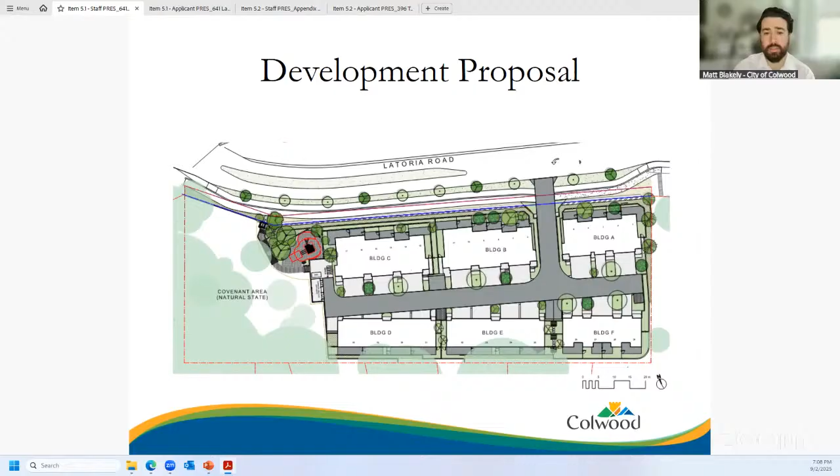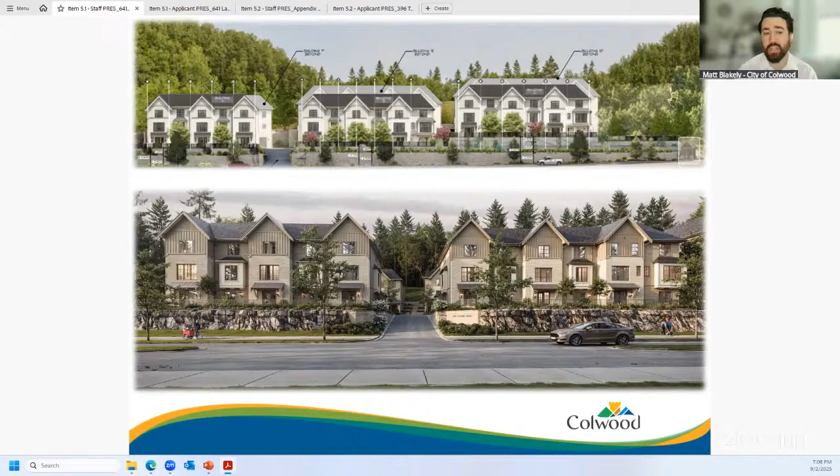These are a couple renderings from the Latoria perspective. As you can see in the bottom rendering, there are pretty steep slopes and existing bedrock formations making up much of the frontage of Latoria currently. There's limited site depth, which introduces several challenges necessitating large retaining walls in several locations to make the proposed development feasible. Next slide, please.

The proposal has multiple retaining walls that exceed the maximum permitted retaining wall height of 1.2 meters. The subject retaining walls needing a variance are highlighted in pink. I should clarify, a comment came in during public participation that any retaining walls over 1.2 meters will be required to be designed by an engineer, so that's not a concern with this project. Those designs usually come at the building permit stage once all development variance permits and development permits are approved. The highest retaining walls are generally at the back of the property near building D, and then as you can see, several along Latoria Road would sit on top of an existing bedrock rock face wall.

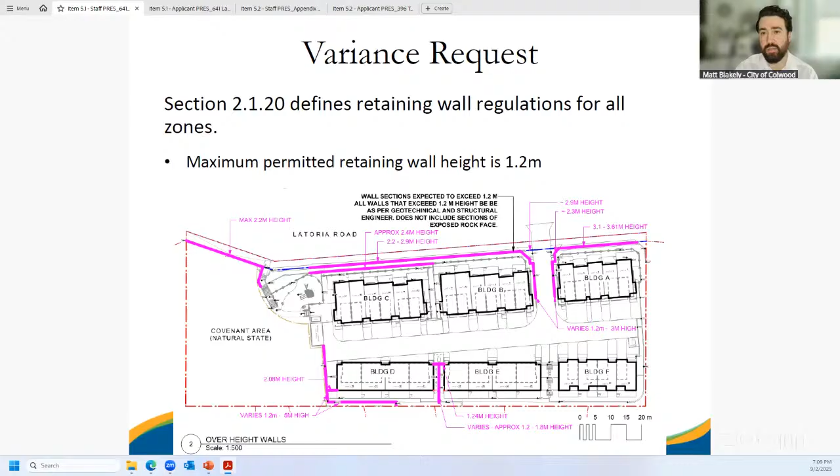Staff do recognize that the roughly 18 feet at the highest point will be an imposing visual presence, but I think there are some mitigation strategies the applicant is using that will help to mitigate that. Next slide, please.

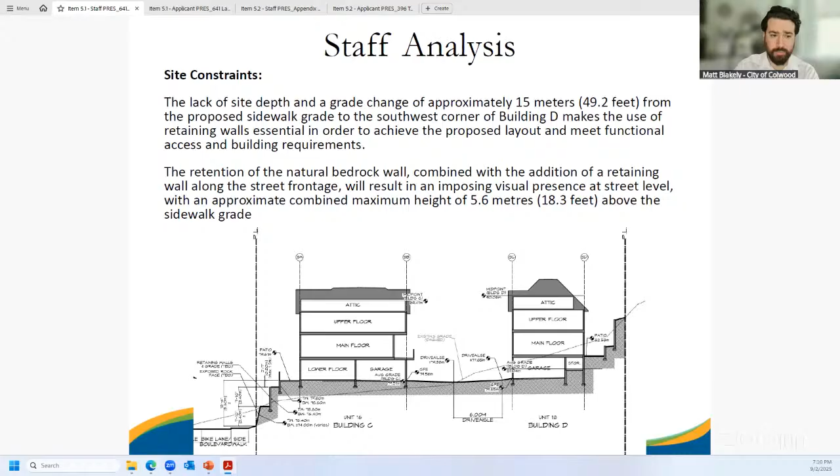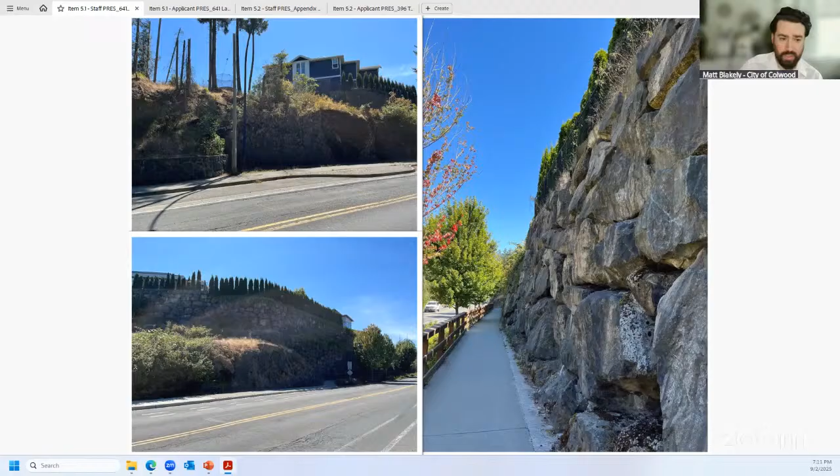Some more renderings showing the treatment on the rock walls. The applicant has also proposed the use of vegetation for screening, which in combination with a textured verti-block wall system, shown in the top left corner image, with a retaining wall in the bottom left corner, is the texture they're proposing. The applicant has a few images in their presentation that will speak to this as well.

The anticipated appearance of the verti-block walls and natural bedrock walls integrated with vegetation will help to mitigate the overall visual appearance and reduce the negative visual prominence of the walls, enhancing their integration with the environment.

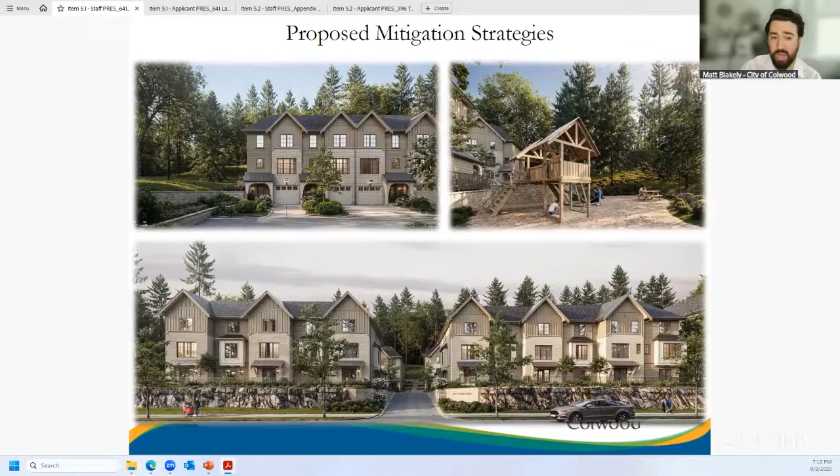As part of the communication process for this application, notifications will be sent out prior to the council meeting. Members of the public are invited to submit comments regarding the variance application, either in writing or by speaking during the public participation period at the council meeting, later on in this process.

Staff recommendation: the proposed 29-unit townhouse development at 641 Latoria Road requires a development variance permit to increase the maximum retaining wall heights in several locations throughout the site to facilitate the proposed development. Considering the unique constraints of the property, the significant portion being preserved in its natural state for environmental conservation and restoration, and the proposed visual mitigation measures by the applicant, staff recommend that the Planning and Land Use Committee recommend approval of the requested variance to council.

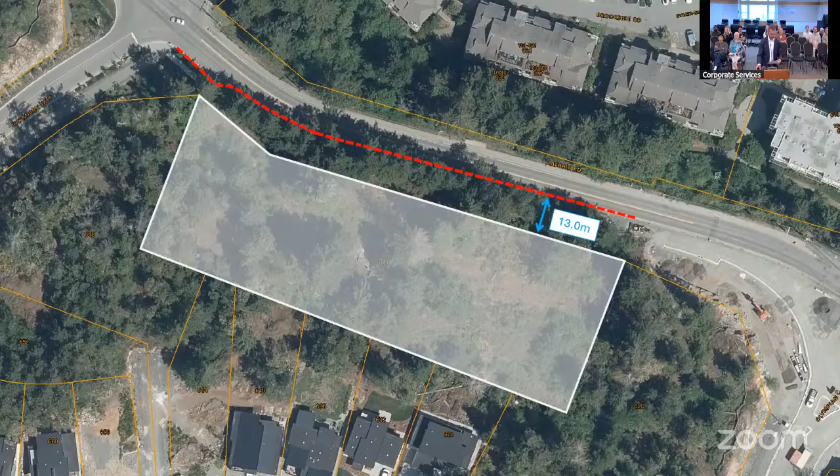The anticipated right-of-way improvements along Latoria are one of the reasons for the requested variance. The existing grade of Latoria is already below the grade of the subject property, and in addition, the current edge of the asphalt, shown by the red dotted line there, is 13 meters away from the existing property line. This image shows the existing conditions along Latoria.

Subject property is to the right on the screen. We've tried to limit the retaining wall heights by sloping the driveway entrance into the property as much as possible, maxing out at about a 15% grade coming into the site.

I'll mention while we're on this slide that in order to facilitate the roadway improvements with boulevards, bike lanes, and center median along Latoria, the entire 13-meter boulevard space between where you see the road right now and our property's frontage will need to be utilized. Hence why the Latoria Road grade will cut further into the property, exacerbating the issue of getting up onto the proposed development site.

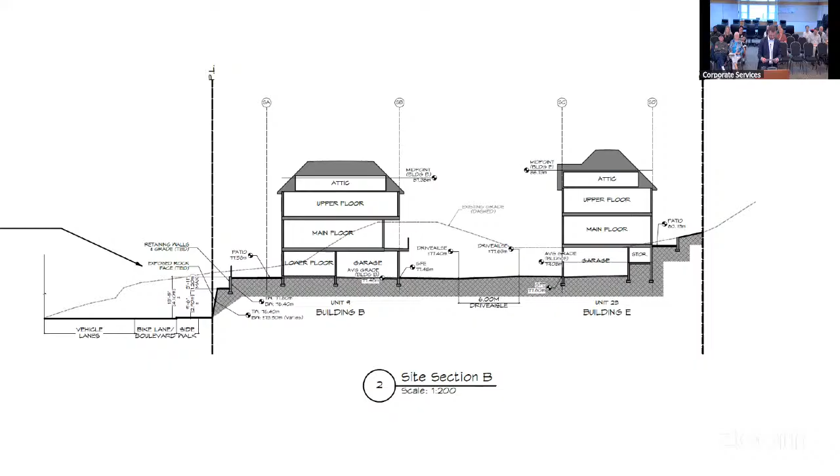This rendering helps illustrate what the frontage along Latoria will look like, with the driveway entrance coming up between buildings A and B. Based on the existing rocky conditions of the site, we anticipate being able to utilize exposed rock face walls along the Latoria frontage. We feel this would be the most natural looking approach to the design and consistent with other conditions we see within the neighborhood. Lastly, the area behind building D will also require over height retaining walls.

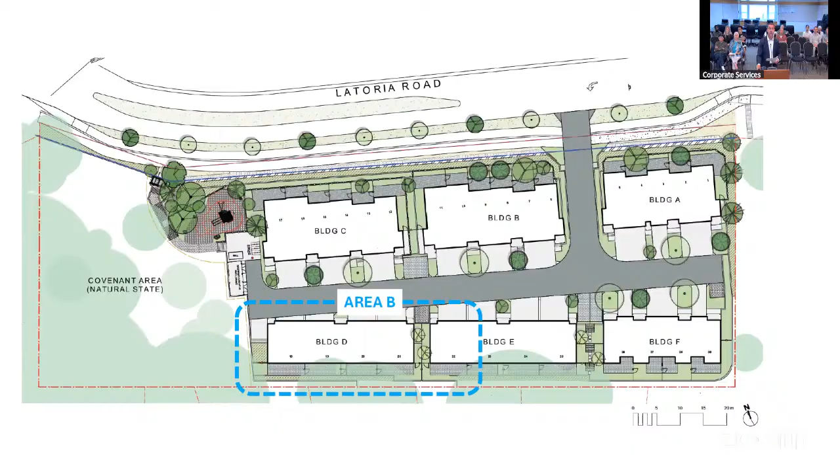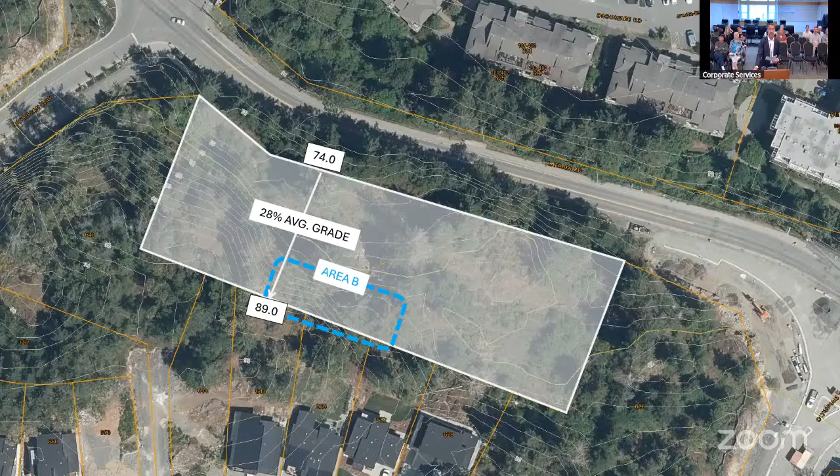The previously mentioned site conditions, along with a relatively steep average grade of approximately 28% along the edge of Area B, result in the need for this additional area of over height retaining walls along the back. So in Area B, the maximum height of the wall at the southwest corner will be 5 meters, tapering down in either direction, eventually running into the 1.2 meter height requirement.

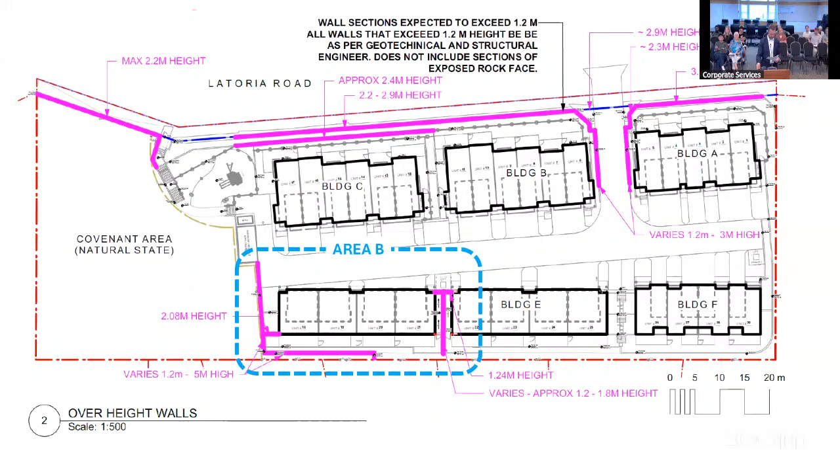So in the section behind building D, you'll notice we've introduced a lower 1.2 meter high wall before stepping back to the over height portion. This will include a landscape strip and help soften the condition for the residents in the rear building. Only 2 of the townhomes in the entire development will have these taller walls reaching that 5 meter mark.

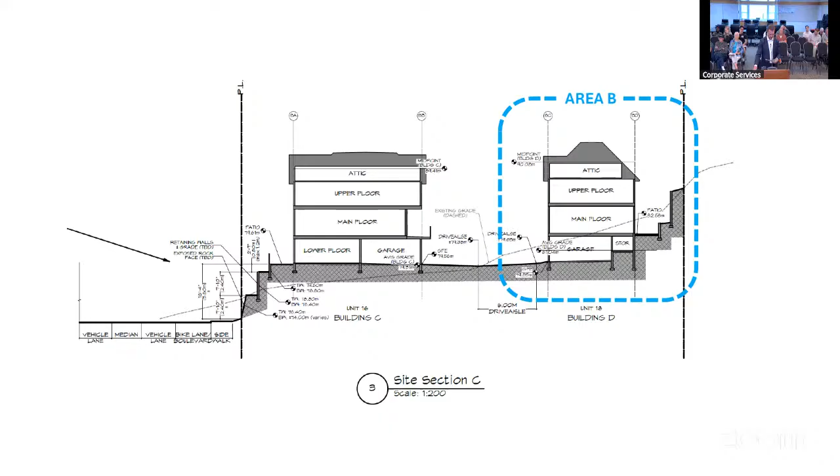Thank you for your time.

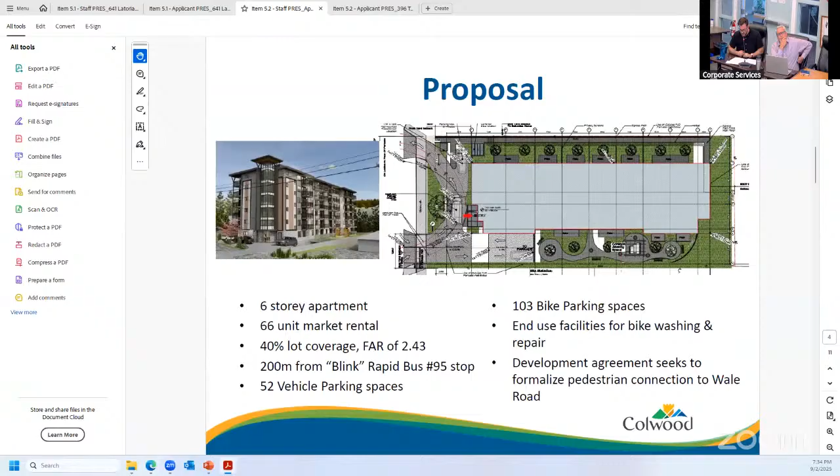So the Colwood Corners built form policies in the OCP. The land use designation Colwood Corners is an intended growth area, supporting a mix of low rise and mid rise, as well as high rise multi-unit buildings reaching heights up to 12 to 15 stories.

The base floor area for any new development within this area is a floor area ratio of 2, with potential maximum densities reaching a floor area ratio of up to 4.5. The highest development densities are planned along key corridors, including Sooke Road, Goldstream, and Wale, where we'd ideally see buildings reaching up to 15 stories. The proposal, with a floor area ratio of 2.4, does align with the OCP's designation for the area of Colwood Corners.

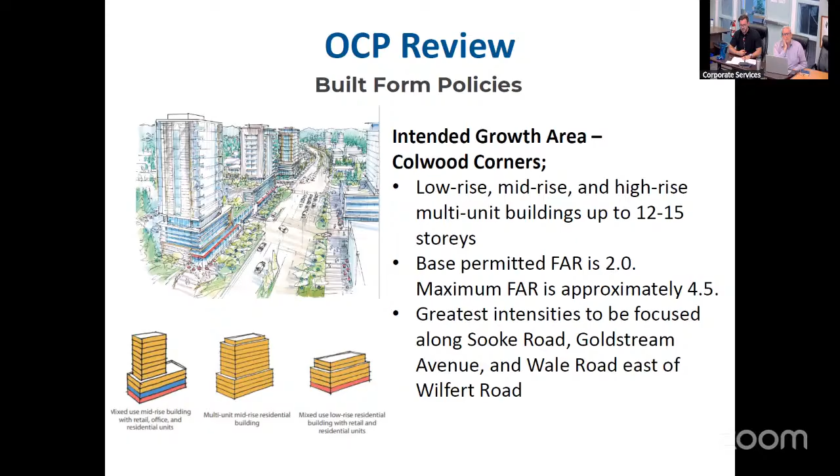The proposed Tamarack Colwood Corners zone was intended to serve as a template for future development in the neighborhood. While the parameters allow for the construction of a 6-story building, the zone would also permit townhouse development. The following key regulations support the apartment use: a 2.5 max FAR, maximum lot coverage of 50%, and required setbacks of 5 meters from neighboring properties.

Maximum height of up to 6 stories. This was mentioned earlier in terms of how that would adjust for townhouses, as any such proposal would have to come forward for rezoning. There'd be an opportunity to insert a townhouse maximum height there, however they'd still be under the maximum density of 2.5 FAR. So this zoning framework provides flexibility for a mix of residential building types while maintaining appropriate density and spatial separation.

In terms of communication and timeline, tonight we're at the Planning and Land Use Committee, where a recommendation will be forwarded to council. That council meeting will be October 14th, for the public in the crowd who are interested in participating again.

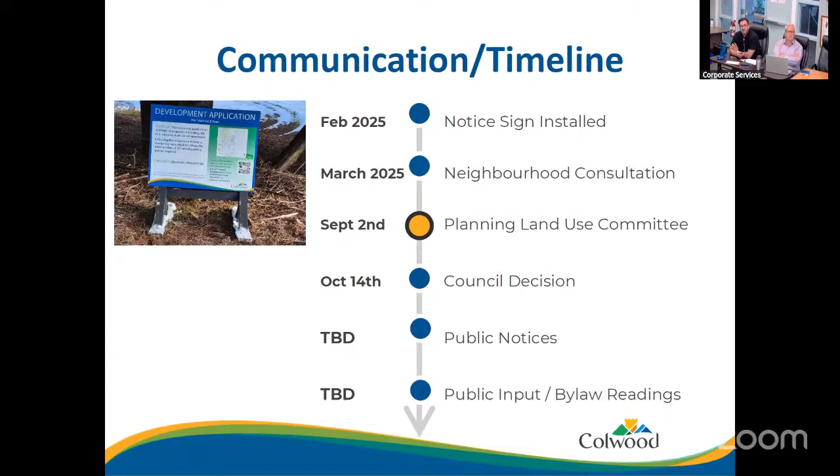So the staff recommendation - have to give me a second as it's changed on this. Wow. All right, I'll read it through here.

So that the Planning and Land Use Committee recommend to council that Colwood Land Use Bylaw 151, 1989, Amendment 225, Tamarack Colwood Corners, Bylaw number 2085-2024, be considered for first, second, and third readings.

That prior to adoption of the Colwood Land Use Bylaw 151, 1989, Tamarack Colwood Corners Bylaw 2085, the following long-term conditions be registered within a Section 219 development agreement to address pedestrian and bicycle connectivity. Prior to building permit, the developer would be required to enhance pedestrian and bicycle connectivity from Gamble Drive to Wale Road to promote active transportation. Potential infrastructure improvements may include sidewalks, sharrow bike lane markings on the road, and directional signage.

That prior to building permit approval, the developer will submit plans to incorporate transportation demand management measures as detailed within their submitted parking study. These measures include providing long-term bike parking that exceeds bylaw requirements by 40%, installing 110-volt e-bike charging outlets at 50% of the long-term bike parking spaces, sizing 15% of the bike spaces to accommodate cargo bikes, and delivering end-trip facilities such as maintenance and cleaning stations to further support active transportation.

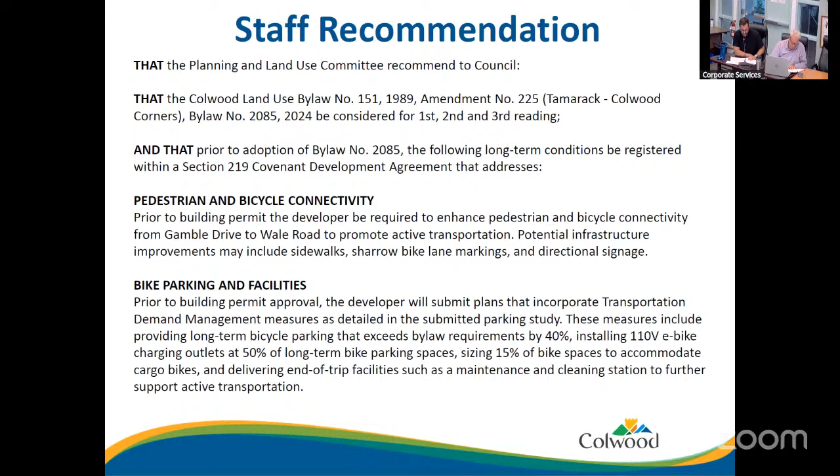And that prior to adoption of Land Use Bylaw 151, 1989 Amendment 225, Tamarack Colwood Corners Bylaw 2085-2024, approval be received by the Ministry of Transportation and Transit.

And that Colwood authorize the concurrent processing of a development variance permit application in conjunction with the associated rezoning application, that the requested variance of off-street parking regulations to allow no less than 70% of the minimum required parking stalls be considered through the DVP process. And further, that public notification and opportunity for comment be provided in accordance with the development variance process prior to the approval of the requested variance.

Sorry, this one should have been dropped. Yeah, sorry, I apologize, this one should have been dropped from an option there.

It's there, it's good. That the director of planning be authorized to grant the following variance at the time of development permit issuance: that the required number of parking stalls under off-street parking regulations Bylaw number 1909-2022 be varied to allow the developer to provide no less than 70% of the bylaw's minimum requirements. And further, that public notification and opportunity for comment be provided in accordance with the development variance process prior to approval of the requested variance.

Okay, that's on. Good evening to the chair and members of the Colwood Planning and Land Use Committee. Our presentation tonight is going to provide some details around our rezoning application in terms of the Colwood land use considerations that the planner has gone over to some extent already.

Some of the location features, details on the traffic and parking analysis will be provided that we completed for this project, followed by some of the design features at a preliminary stage.

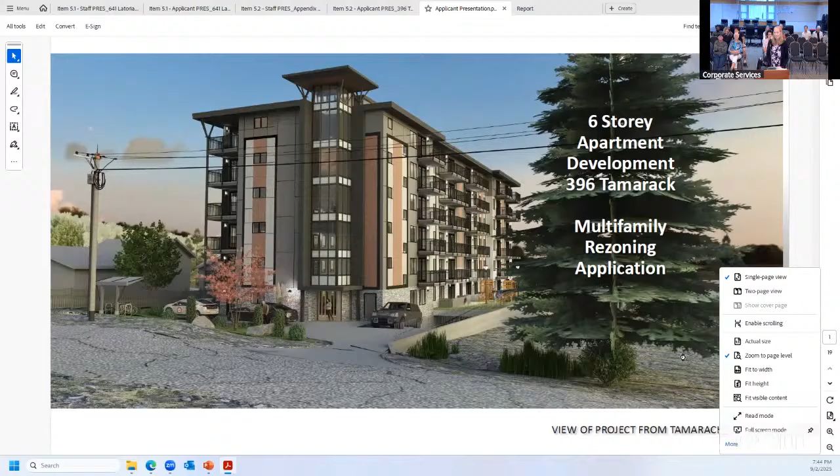So this, as was already mentioned, covers some of the planning and land use designation considerations for this development proposal. This is located in the OCP area of Colwood Corners, which has also got a designation of centers. Some of the other pertinent policies reviewed are the nearby Gateway and Triangle Lands Vision and Action Plan, the 2020 Housing Needs Report, the Transportation Master Plan, the Active Transportation Plan, the Climate Action Plan, and the Urban Forest Plan.

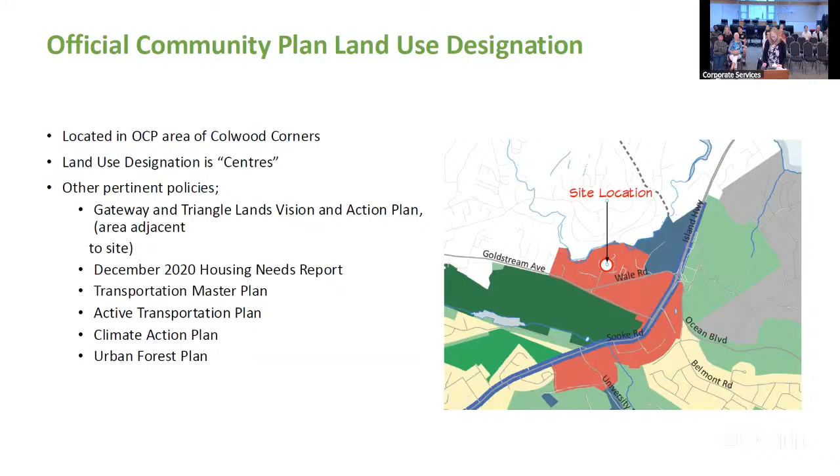As was mentioned, this figure shows the location of the center of the newly established Colwood Exchange area, which has a 400-meter radius. We're 200 meters beyond that with this project site.

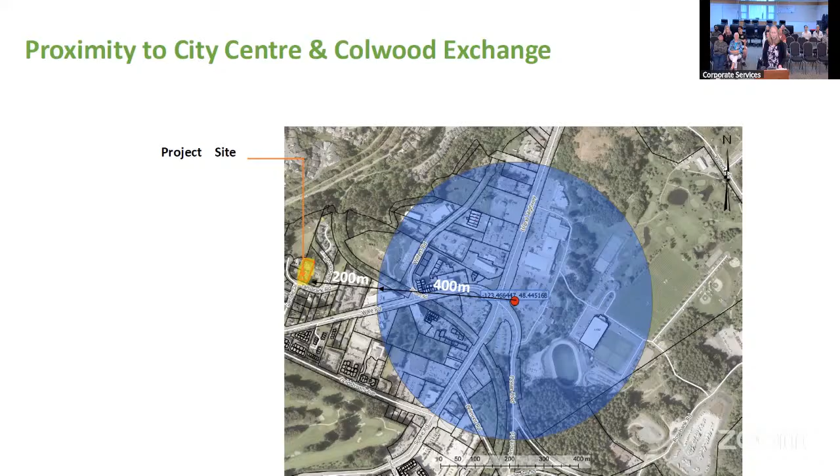Some of the property location features I wanted to mention: this increased residential density, while commercial is not permitted in this specific area, is proposed for other nearby areas. Having a good supply of residential properties within walking distance will help support that commercial activity. We have an increased supply of rental units, including a large number of studio suites, which by their nature are more affordable, particularly for seniors and students.

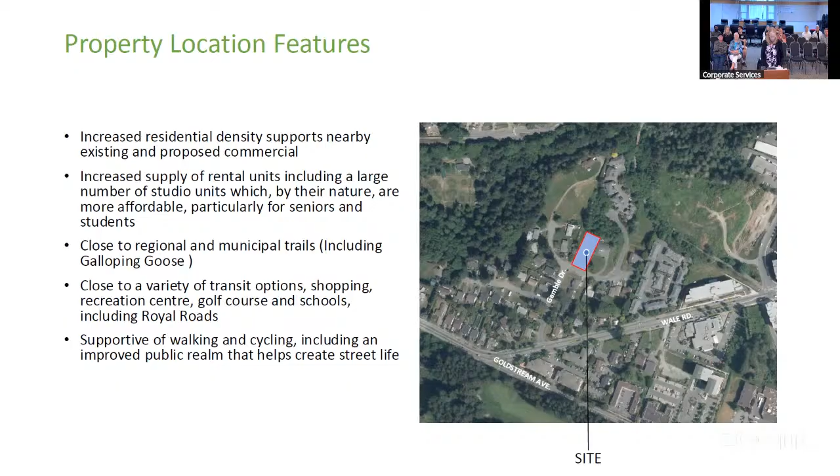We're close to the regional and municipal trails, including the Galloping Goose, and close to a variety of transit options, which were already mentioned and we'll provide more information on, as well as shopping, recreation centers, golf courses, and schools, including Royal Roads. This supports walking and cycling, including an improved public realm.

At this point, I'd like to introduce Matt Lilly, who's from Watt Consulting. Matt provided us with the discussions and calculations used to determine the traffic impact and parking.

The local area around the subject site has been developing. For instance, Wale Road and Wilfert is now signalized. This is in conjunction with an increase of high-quality transportation options, such as the Blink Bus Rapid Transit, and upgrades to the Galloping Goose Trail.

Transit will be easily accessible from the site, as future residents will be able to take a quick 4-minute walk to the Wale Road and Goldstream transit stops, and a relatively easy 13-minute walk to the Colwood Exchange.

Cycling is also being improved significantly in the area, as the overpass will further allow people to choose bicycles, while e-bikes and cargo bikes will continue to allow people the opportunity to replace car trips with bicycle trips.

A transportation impact assessment was conducted for the site that looked at the local area in terms of current traffic conditions. This found that at peak hour, there is an expected increase of 26 vehicle trips, or 1 trip every 2 to 3 minutes.

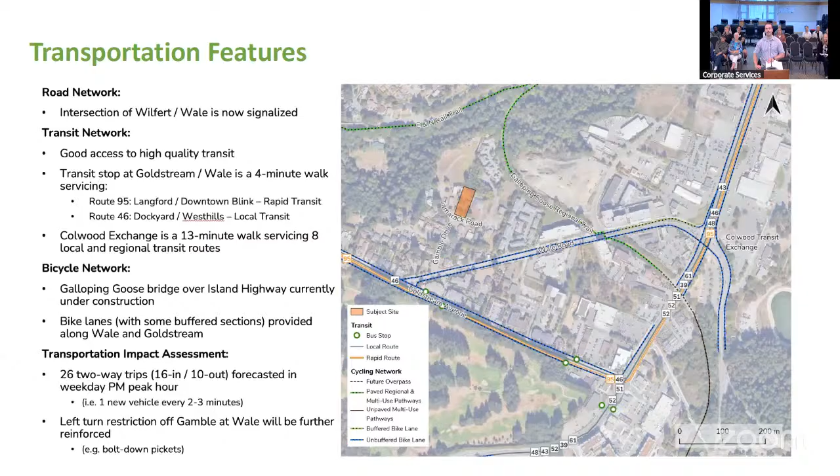Finally, to ensure the least impact on local residents, we conducted 2 on-street parking assessments at 9 p.m., timed to assess the greatest likelihood of catching residents and visitors. These yielded an occupancy rate of 26.5%.

And I just want to add that we didn't assume the use of any of the on-street parking in our study.

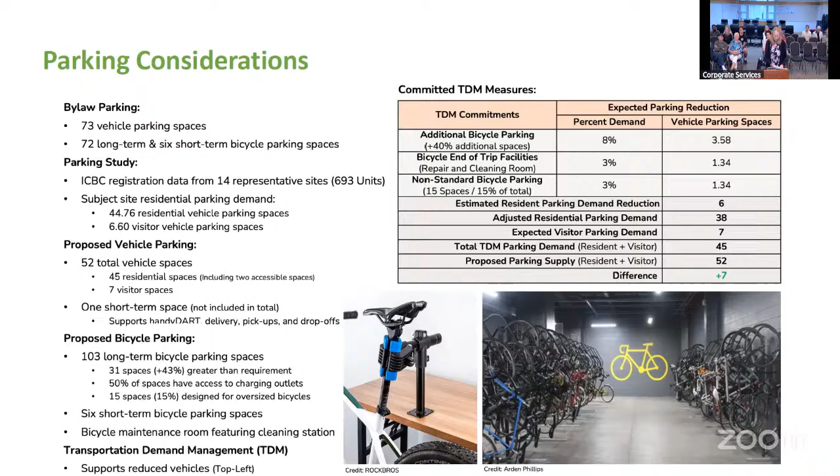So at this point, just move over a bit to consider the frontage and site servicing improvements. We've done the calculations to show that both water and wastewater capacities are available for this development. We're proposing stormwater retention that would mimic pre-development flows, so no additional stormwater would come from the site, and of course full frontage improvements to Colwood's municipal standards.

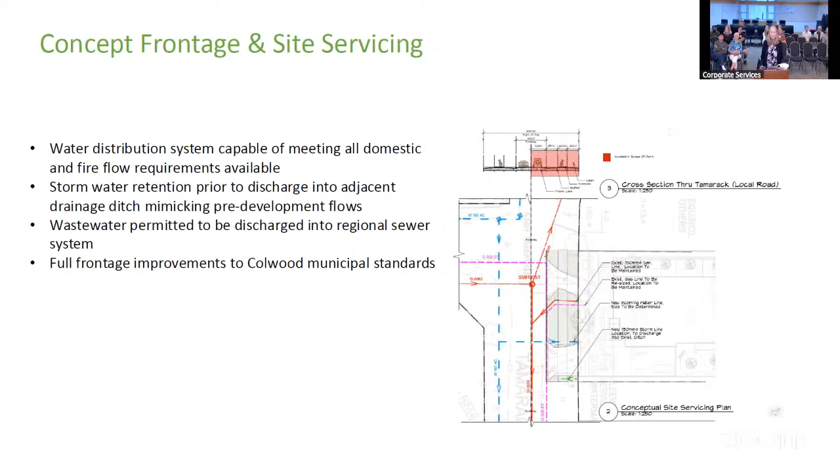A little bit about the site data. As was mentioned by the planner, we're at about 2.43 floor area ratio, which is above the minimum of 2 and below the maximum of 4.5.

The unit mix is 42 studio units, 12 one-bedroom, and 6 each of 2 and 3-bedroom units. Lot coverage will come in around 40% of the site area, and the height would come in at about 6 stories.

I've also shown the proposed setbacks here. In the existing zone being developed for the site, staff have indicated that this development, as shown here, would conform to all of those requirements.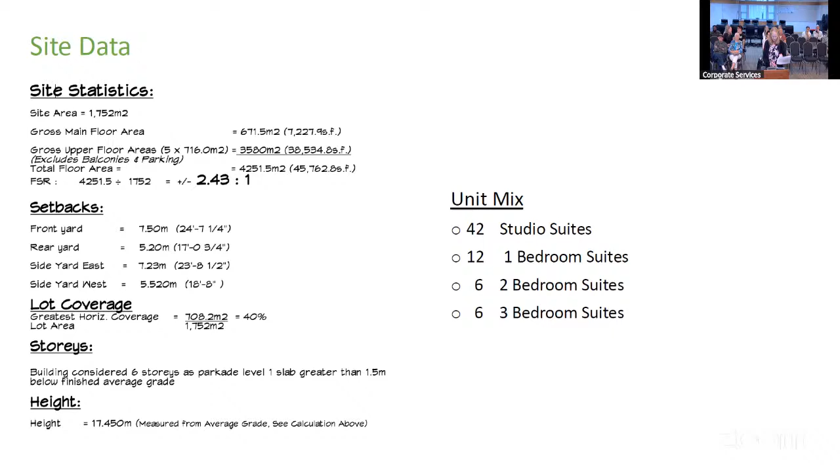At this point, just a few slides to show the site plan. You can see the location of the building above ground on the site, and the setbacks are shown here. There is a semicircular access drive which would facilitate pickups and drop-offs.

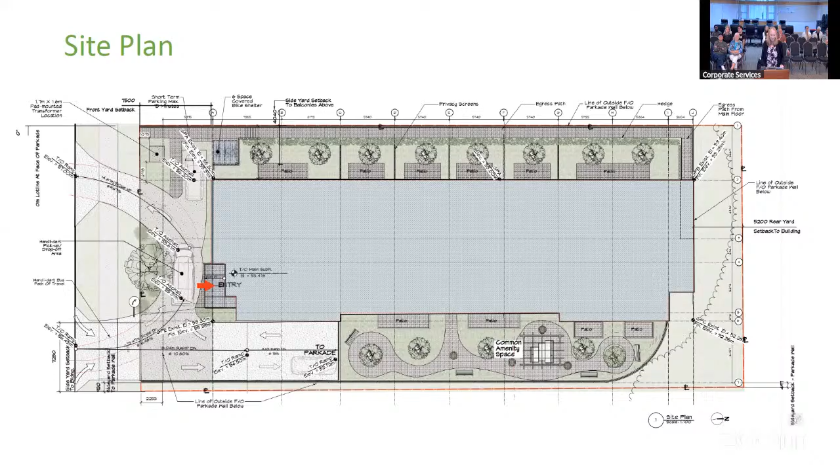We're also proposing one short-term parking stall to be provided, which was not included in the numbers we've calculated. This is twofold: to provide short-term parking for pickups and drop-offs, more likely for people without vehicles, and also in the hope that one day we'll have something like Modo in Colwood, providing a location for them to park here.

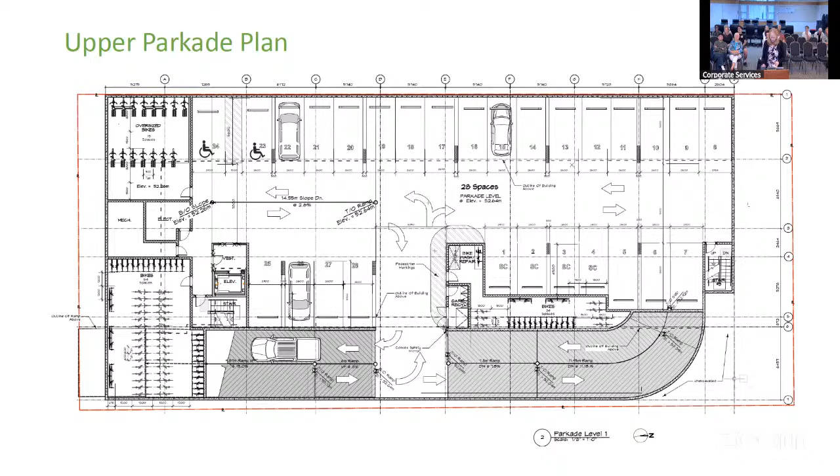I now have a couple slides just to show the parkade. This slide shows the upper parkade level, where all the bike parking is—you can see both the regular and cargo bike storage or lockup areas, as well as the bike repair facility. There's also a smaller second floor of parking provided, shown here.

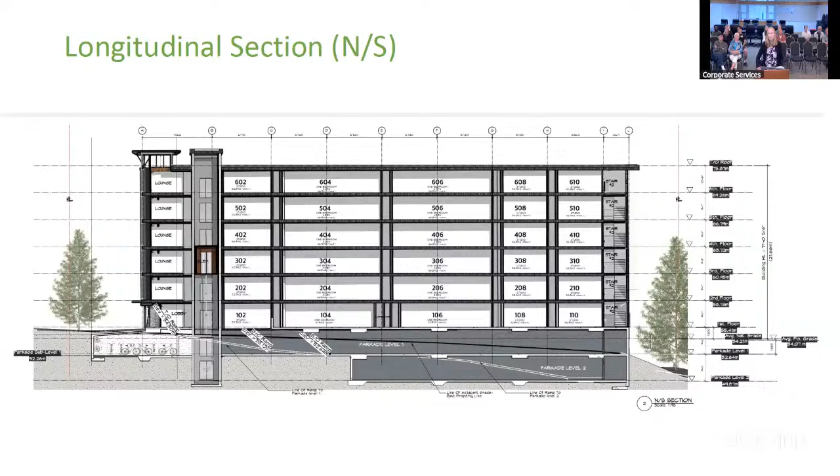At this point, I just want to mention that I'm here, and the owner, Dave Stevens, is here. Matt Lilly can come back up, and architect Mike Moody is here as well if you have any questions.

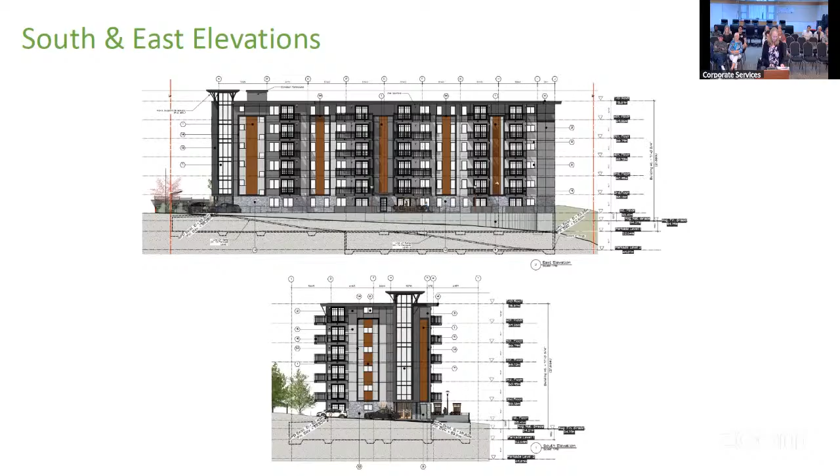Great, thank you very much. I would look to the committee for questions. I'm not going to look at you, James—look at other people first. Councillor Jansen, anybody? I see Kathleen. Okay, we'll start there.

Just a factual issue, and anyone either from the city or from the proponent can answer it for me. I've heard from the community that there's an issue potentially with the parkade encroaching on the property line. I'm wondering if we could just address that issue.

Oh, sorry, you have to just hit the button on the microphone there. Thank you—oh, it didn't go on, sorry. There you go, there we go.

The lot slopes gently down from Tamarack to a ravine at the bottom. At the front, the building is basically flush with grade. At the very back, the building protrudes, I think, 3 meters above the grade we're proposing. Now, the lot lines are 0 on the east side, but I think this all is conforming to the bylaws right now—it's a 0 lot line.

The construction of the foundation of the parkade will be done per the geotechnical engineer's report, doing it in sections so you don't have to put any shoring into the adjacent properties. But yeah, it's a 0 lot line on one side.